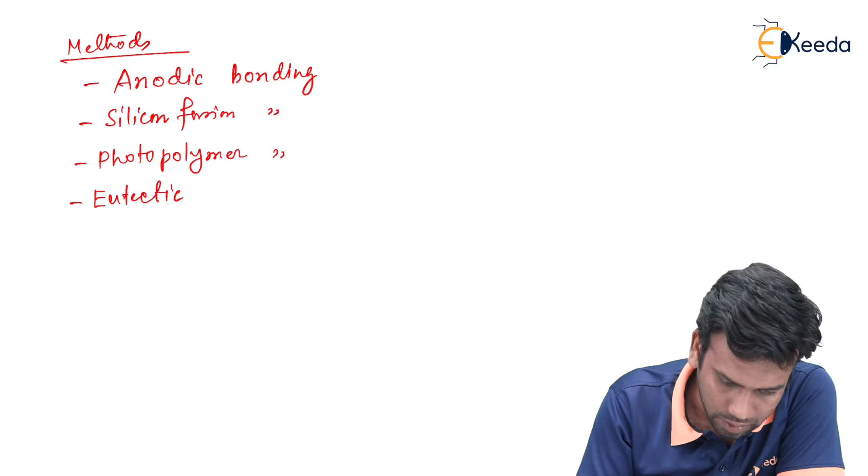The fourth one is eutectic bonding, and there are several others too, like press bonding.

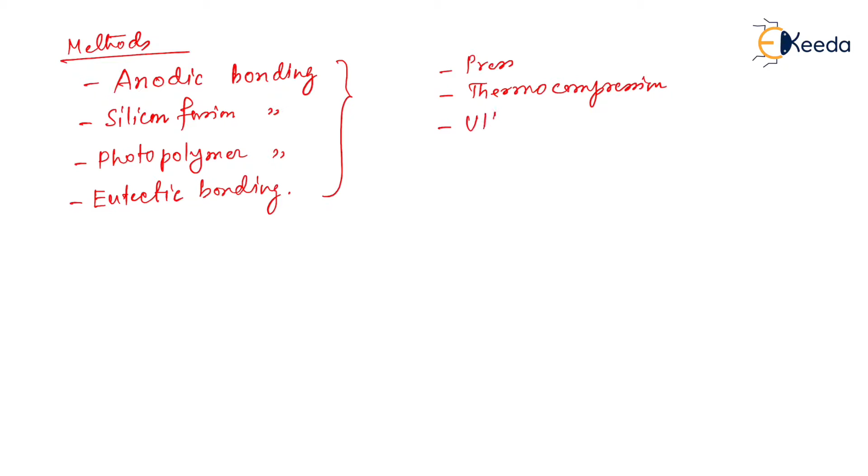There is also thermocompression bonding, ultrasonic bonding, or sometimes called ultrasonic welding type of bonding, then seam bonding.

Another method is laser welding. But out of all these methods, four methods are highly used for their efficiency.

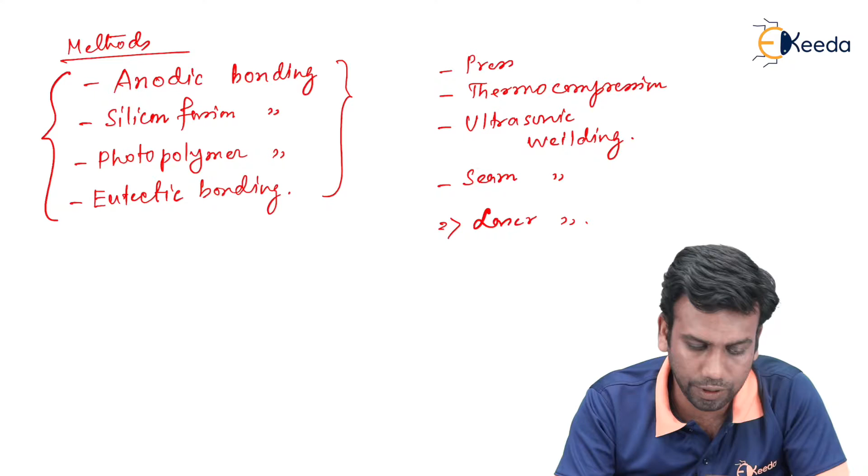So let's first see what is anodic bonding. This anodic bonding is also called electrostatic bonding.

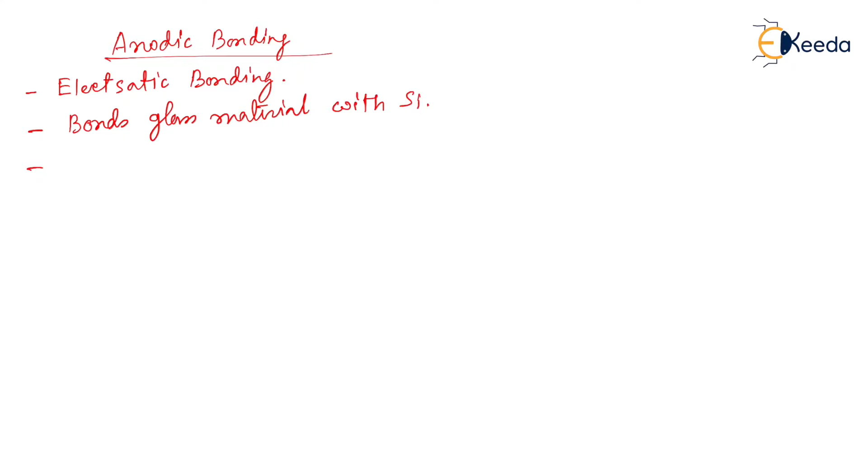It bonds glass material with silicon, and it is used to reduce the temperature to a reasonable level.

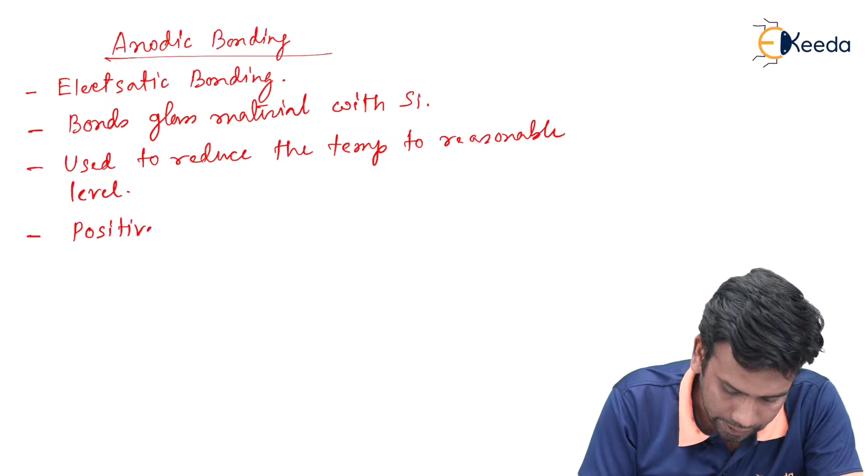In this case, the glass material will produce positive ions. So we can say positive ions of glass drift away.

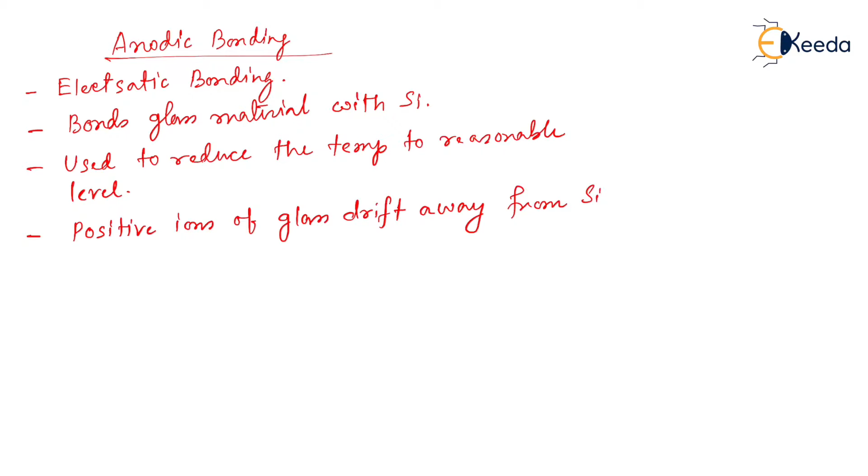They drift away from silicon, causing a high field at the interface.

The next point is that it pulls silicon and glass together.

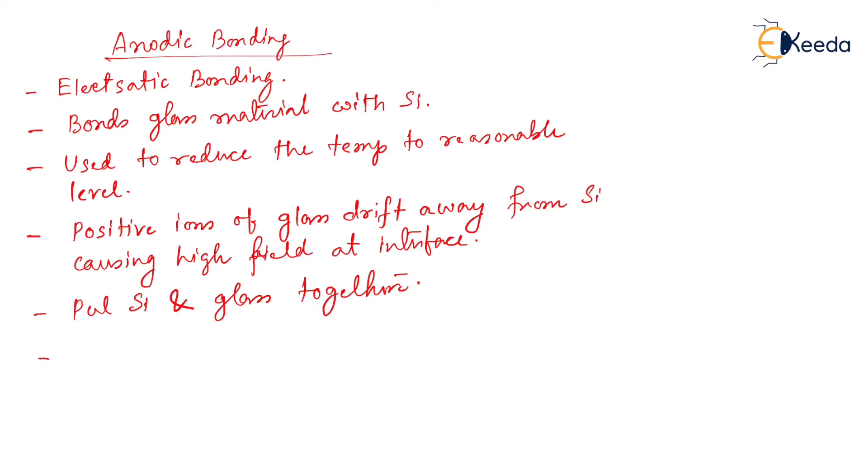Silicon provides the positive ion,

and glass provides the negative ion in this anodic bonding, and it uses glass with a similar expansion coefficient.

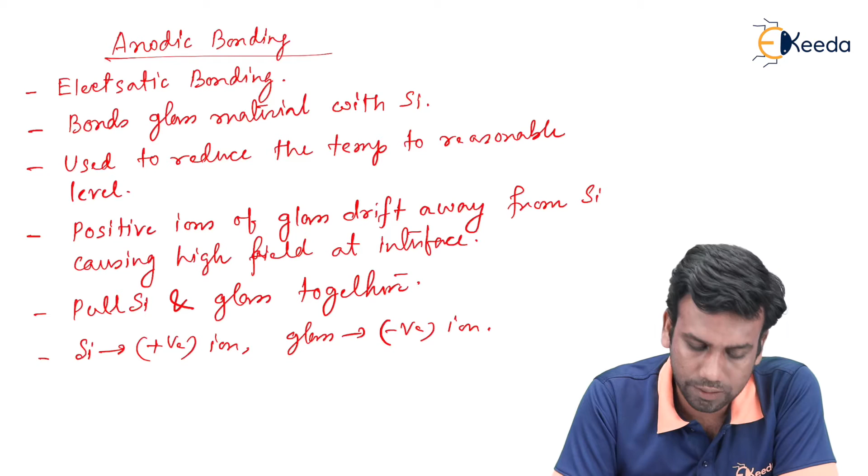So this is anodic bonding, where we just bond glass materials with the silicon substrate.

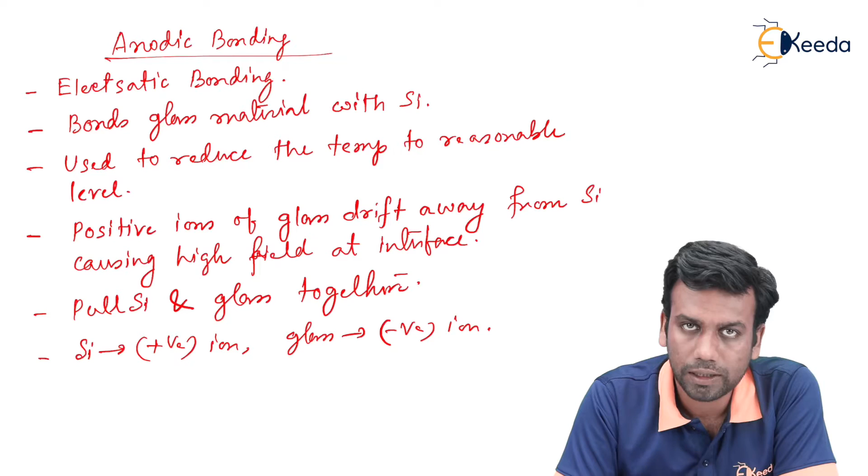Now let us see the structure of this bonding. The structure of the bonding apparatus is like this.

At the lower level, this material is called the chuck material, and on this chuck material the silicon substrate is placed.

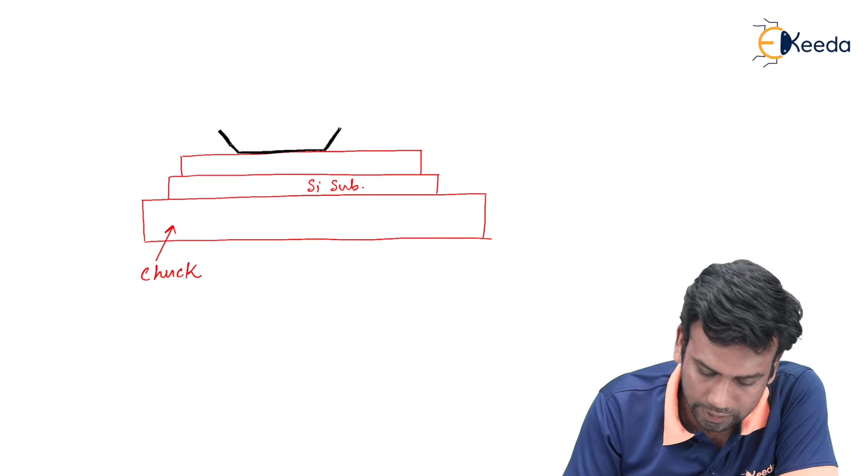Over the silicon substrate there will be a glass substrate, and in this bowl there will be a metal cathode chip.

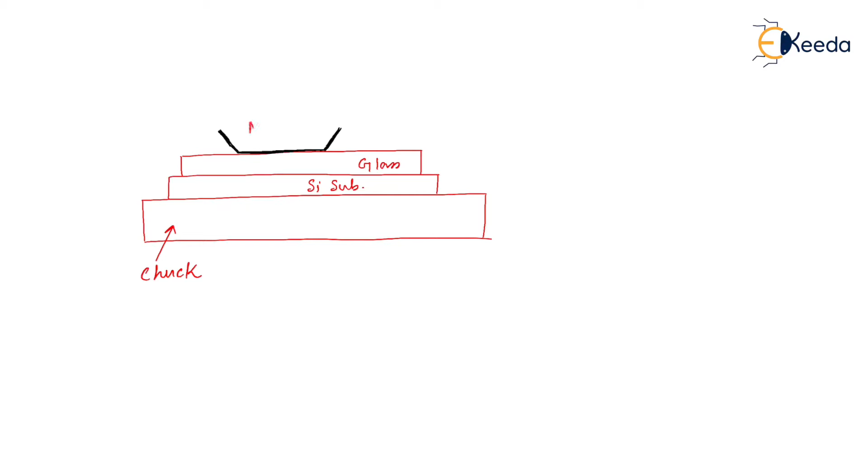This metal cathode chip is connected in this fashion to the negative, positive, and with this chuck.

So this is a typical anodic bonding apparatus that is used for doing the anodic bonding.

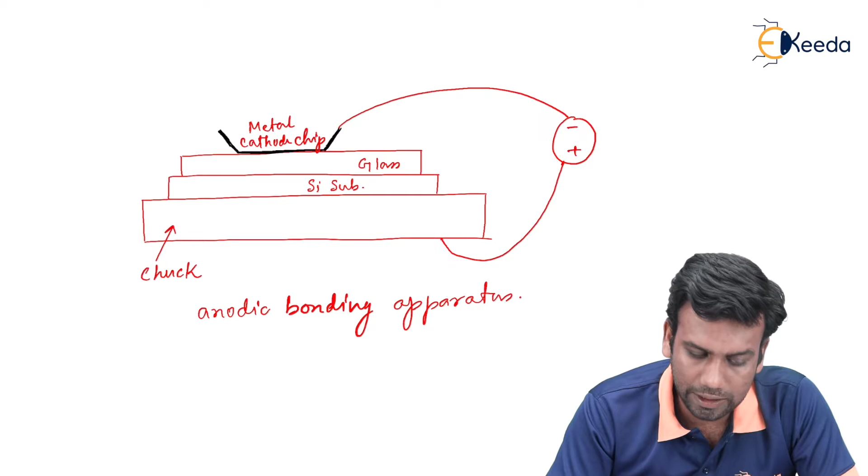Now in this anodic bonding we can see that the silicon substrate and the glass substrate are attached together, and the next bonding is the silicon fusion bonding.

This is another type of bonding that is used, the silicon fusion bonding. In this bonding, silicon to silicon bond

and oxide, that is silicon dioxide, also works.

The second point is that high physical strength is produced during this bonding, meaning it provides high physical strength between the two layers.

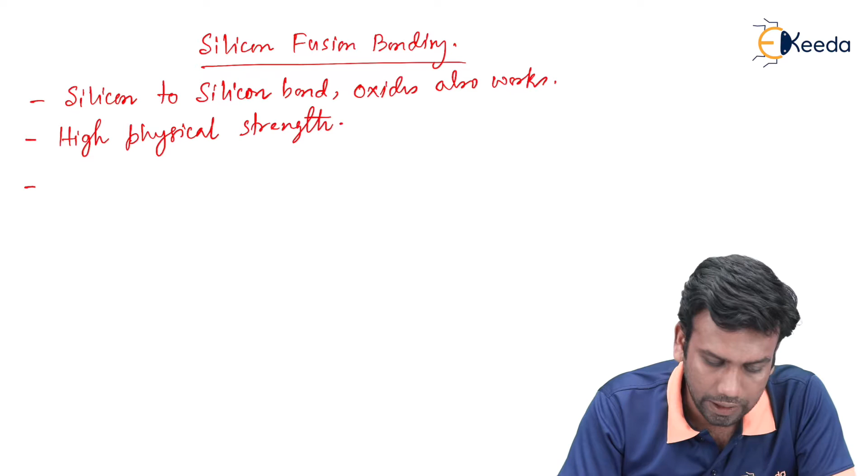The third point is that it requires hydroxyl groups on the surface of the bonding.

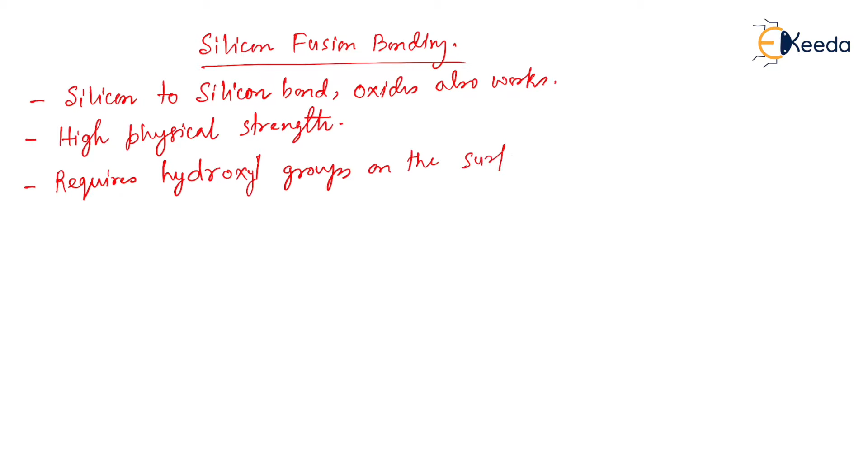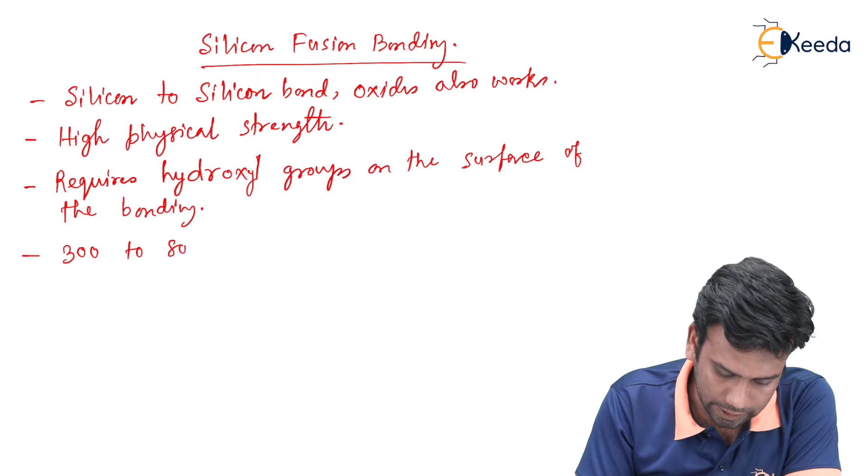The fourth one is that 300 to 800 degree centigrade temperature is required for bonding with higher anneals,

and the use of low melting glass allows a lower temperature bond.

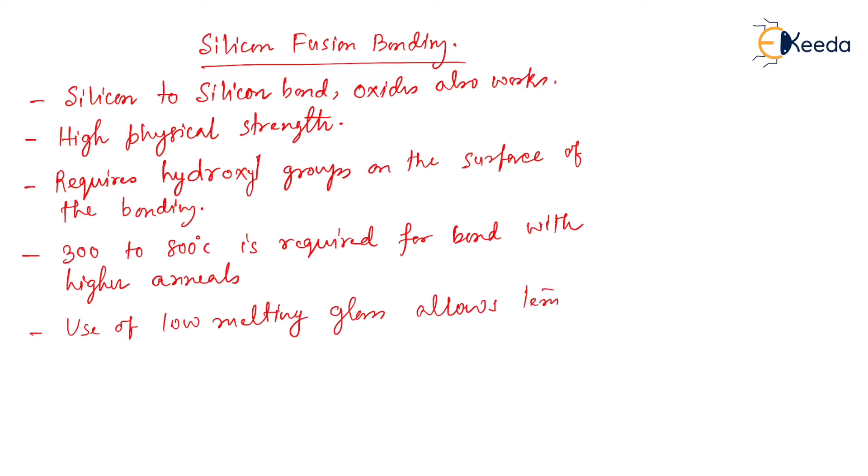So this was about silicon fusion bonding, which bonds silicon to silicon or silicon to silicon dioxide.

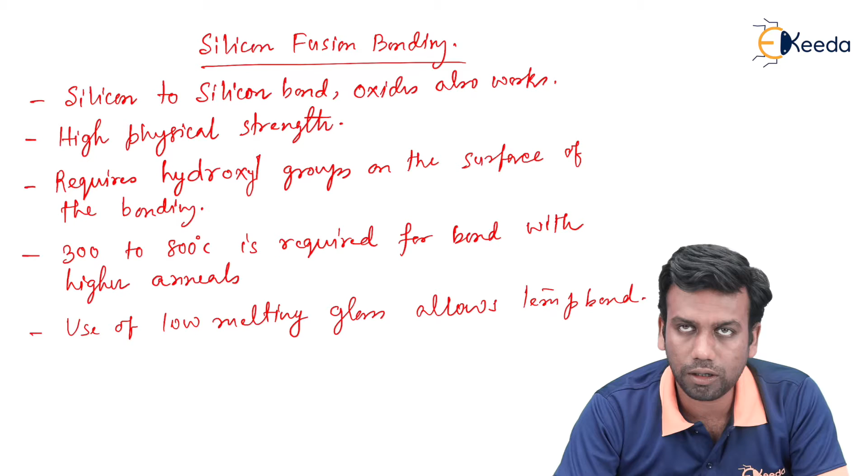Now we will go for the epoxy or polyimide bonding.

In this epoxy and polyimide bonding, both conductive and non-conductive types can take place.

The second point is that it is an inexpensive and simple method, and it requires lower bond strength.

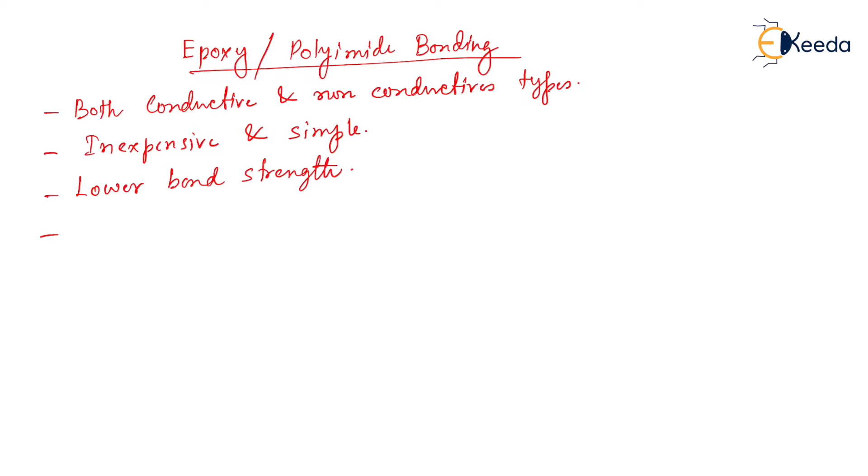It can also form an insulating layer. And the last point is that there is a potential decomposition that takes place.

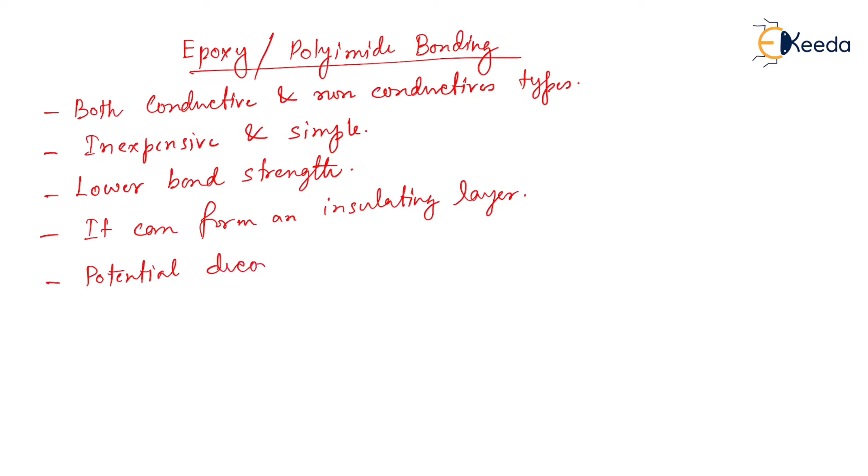One thing to remember here is that in all these types of bonding, we need not go deep into the bonding types.

You just need to understand the points only for the GATE exam purpose.

Now we will move to the eutectic bonding, because from this total IC technology or IC fabrication chapter, generally only 1 to 2 questions come, and they are not so hard.

So we do not need to go deep into this bonding chapter, just an overview of the bondings. That's why we are going for only the overview.

So in the eutectic bonding, it uses silicon metal alloy

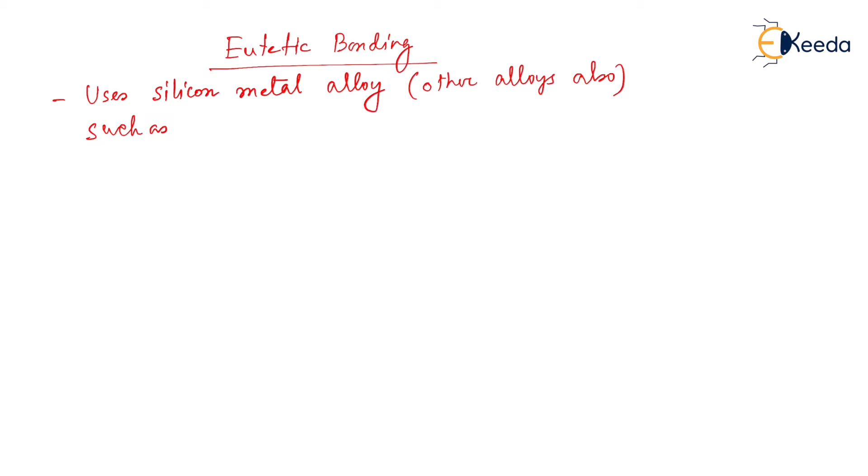or other alloys also, such as silicon with Ag, silicon with Au, and silicon with aluminium.

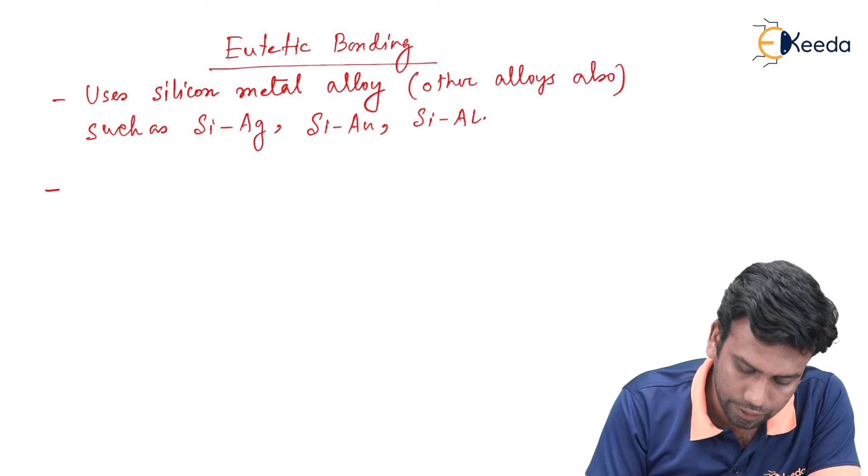In this eutectic bonding, silicon dissolves in gold at about 370 degrees centigrade and up temperatures.

The next point is that it is a relatively low temperature bonding, and the fourth one is that microstructure changes allow high reliability and strong bond, and good heat dissipation and thermal stability.

That means in this eutectic bonding we should be able to find high reliability, strong bond, and good heat dissipation factors.

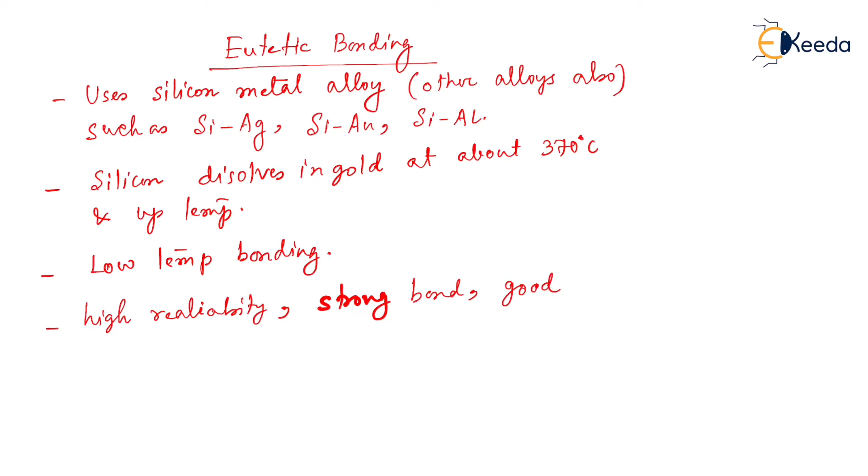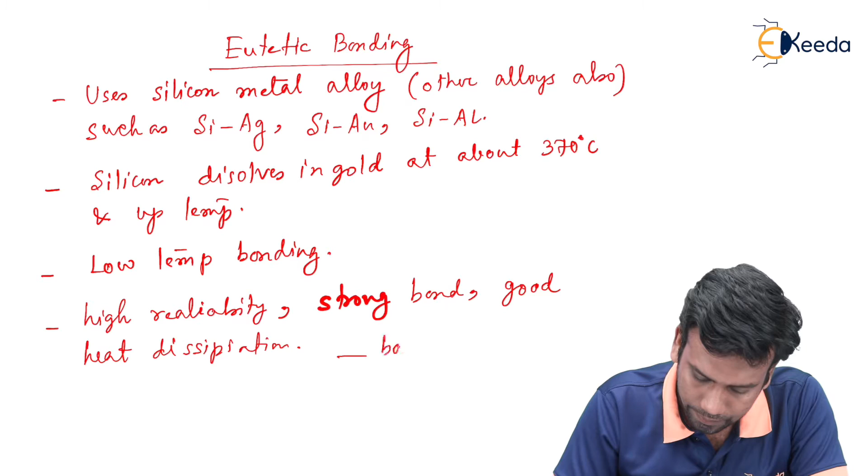And also there is a problem with bonding large areas. That means this eutectic bonding is very good for bonding small areas.

So this is all about eutectic bonding, and there are several other types of bonding that we have already mentioned. Just remember those names, they are not so important for the GATE purpose.

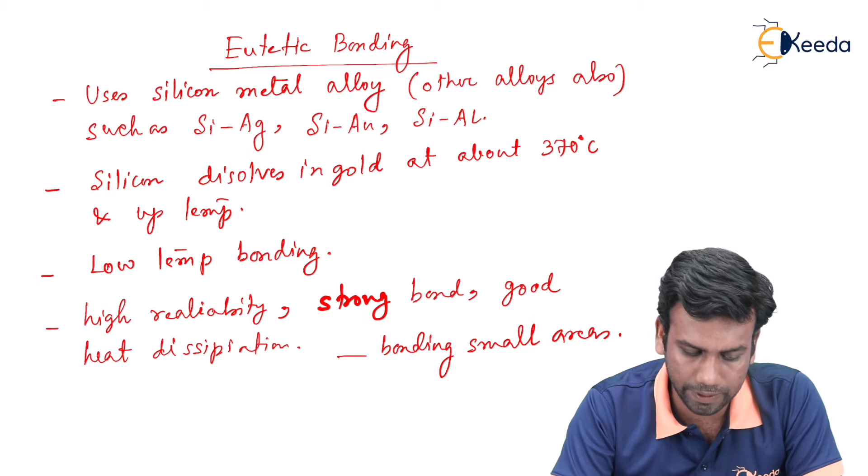Now we will go for the packaging.

Packaging means the connection of the chip to the outside world. So we can say it means connection from chip to the outside world.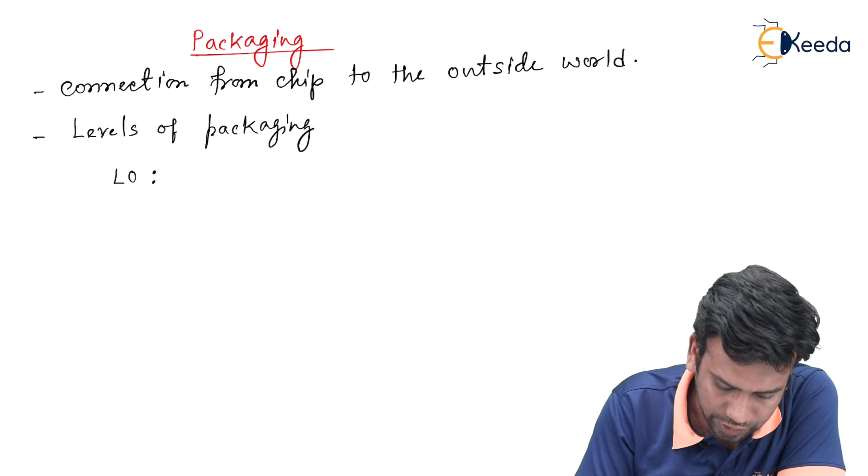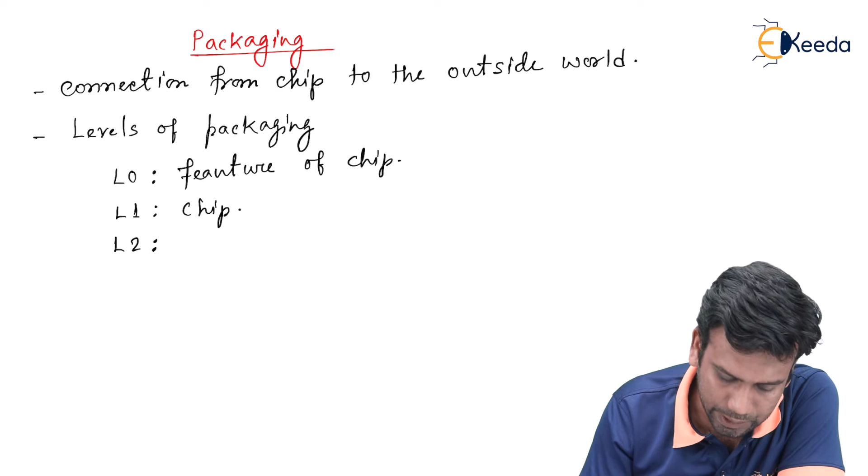There are several levels inside the packaging. So levels of packaging are of different types. Level 0 is features of the chip, that means where the chip is just placed. L1 is the chip itself. L2 is the chip carrier. Level 3 is the card, and level 4 is the board.

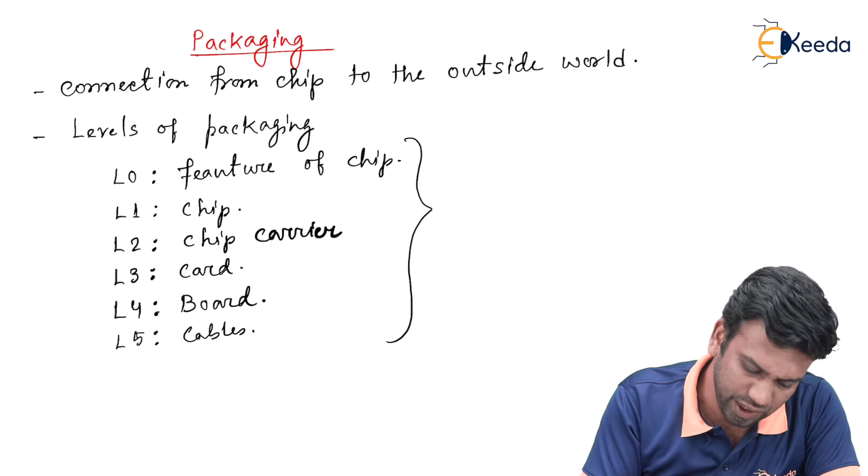These are different levels of the packaging technology, and there is a last level which is the cables. This is the total packaging unit, and within this unit we get different types of levels. So general packaging serves two main factors.

The factors served by this packaging are protection of the device from the working environment, and the second one is the protection of the environment from the device material.

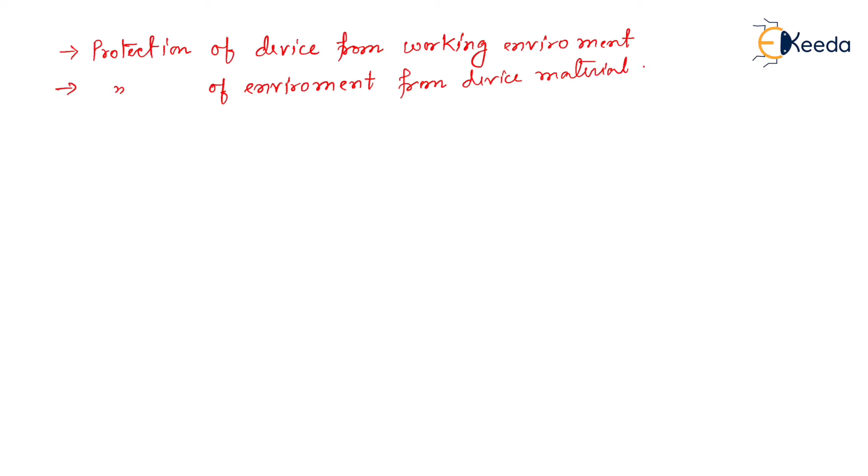Now what protection should be taken from the environment? Electrical isolation is something we should protect the chip with. Similarly, there is mechanical protection also, optical and thermal protection, and also chemical isolation. So different types of isolation can be done using this packaging method.

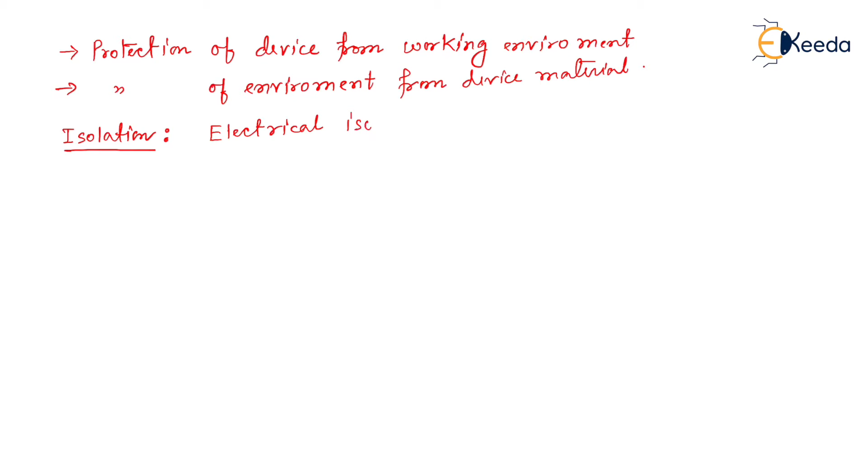So there is electrical isolation, mechanical isolation, optical isolation, and chemical isolation. These are the isolations that can be achieved using this packaging method.

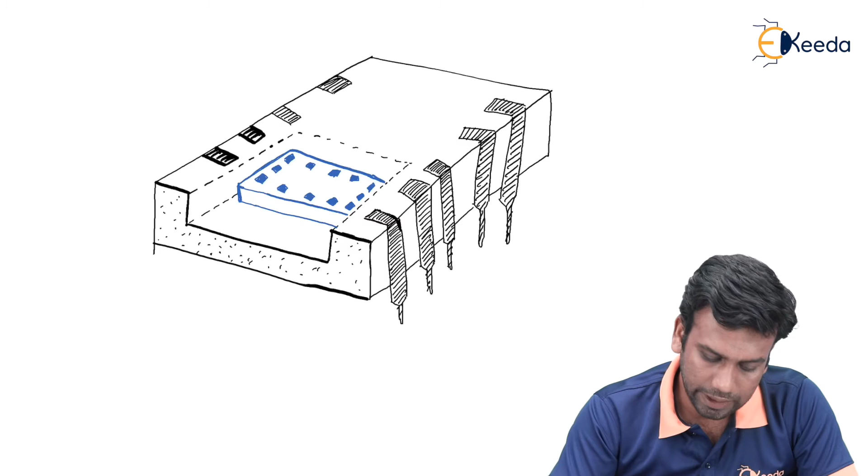Now let's look at the basic packaging method diagram. In this packaging method, the original device is here, and these are the metal pads of the device that should be connected to the outer walls, which are called the outer leads.

If we buy a chip from a market, you can see this black structure with some legs. These legs, called outer leads, are connected to the device metal pad in this fashion. There is a metal connection between this pad and this leg, where a wire is bonded. So wires are bonded on these metal pads.

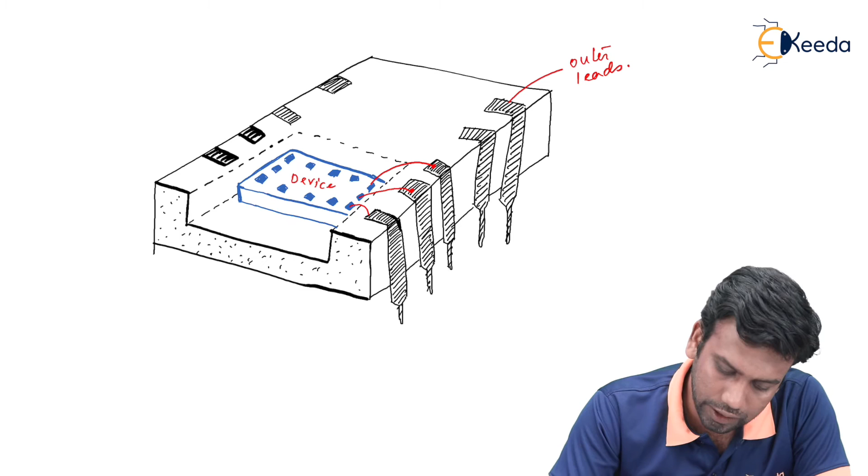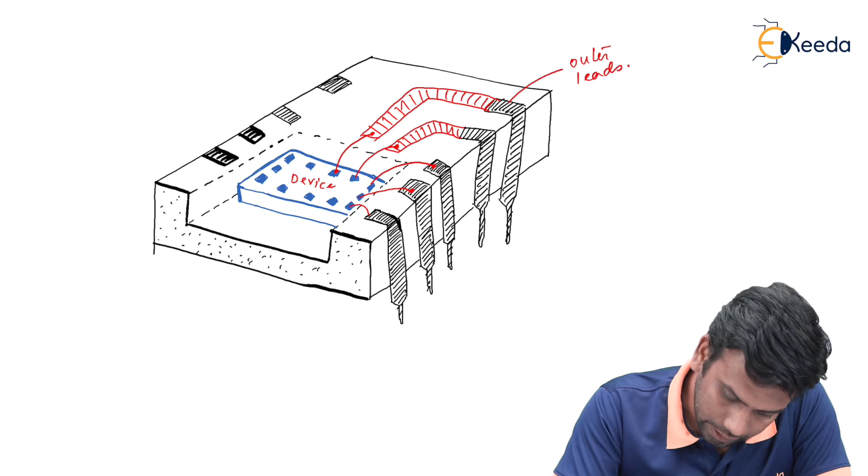Similarly, this leg has some inner legs, which are connected to this metal pad. This inner leg will be connected like this with a wire bond. Similarly, there will be an inner leg coming inside with another wire bond. Wires are bonded here, here, and here.

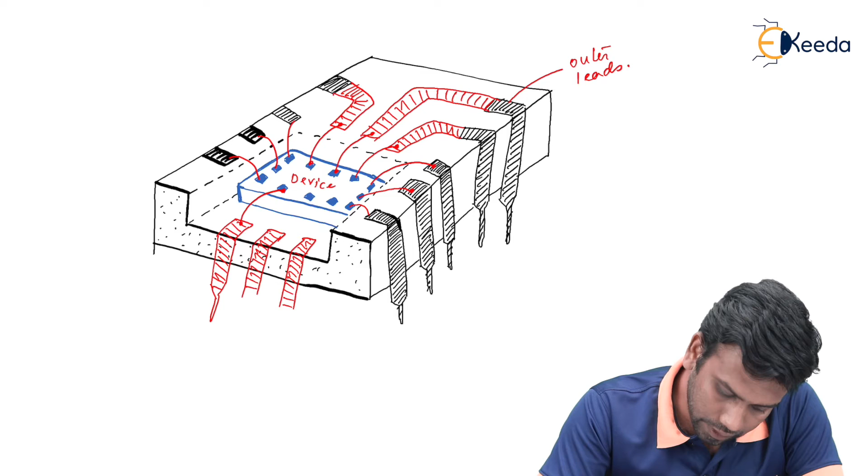There can be connection of another leg in this fashion, so these legs will be connected by a wire to this metal plate. There can be other two metal pads here, which are connecting the chip to the outer world, and they will be connected by this wire bonding.

So this is the general packaging of a chip, and this is all about the packaging technology. We will now discuss the etching and scribing method.

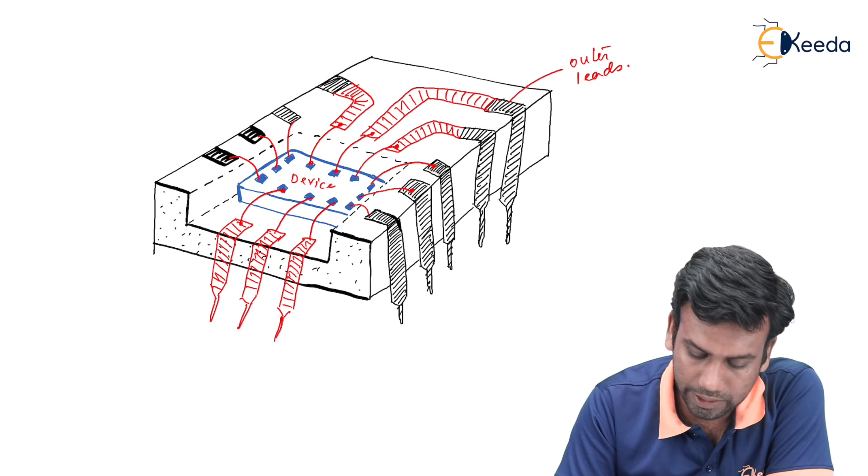Etching and scribing are the two processes done before the packaging or bonding. Etching means removing unwanted material, and generally in IC fabrication technology, the etching process is a wet etching process.

When an IC or device is fabricated, according to the need of the device, some part of the material, some part of the silicon dioxide or some part of the positive photoresist should be etched out so that a selective process can be done on that material. We have to remove the unwanted material from the chip, and this is done by dipping the total device into a solution called the etching solution.

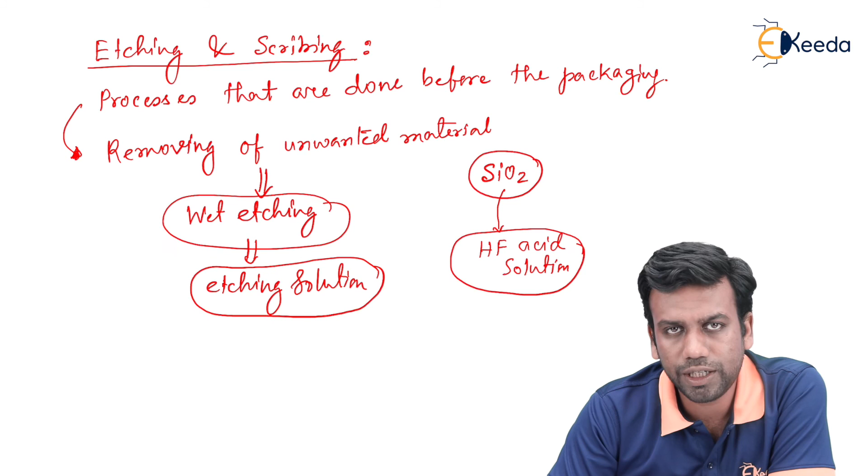Similarly, scribing is also a process which can scribe out unwanted material during the growth of the IC fabrication. These four methods are very important with respect to IC fabrication technology: packaging, bonding, scribing and etching. Generally, etching and scribing methods are done during the growth of the device, but packaging and bonding are done after the growth of the device, after the metallization is done on the surface.

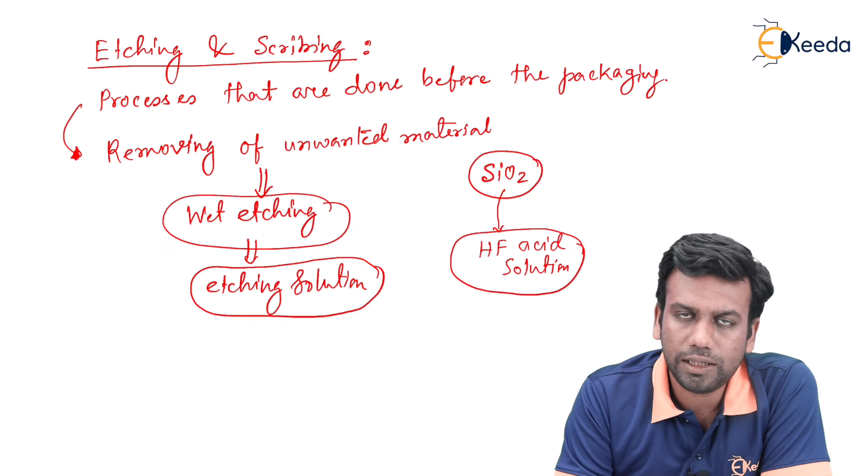So this is all about the bonding process, the packaging process, and the etching and scribing process that are used during the IC fabrication technology. Thank you.